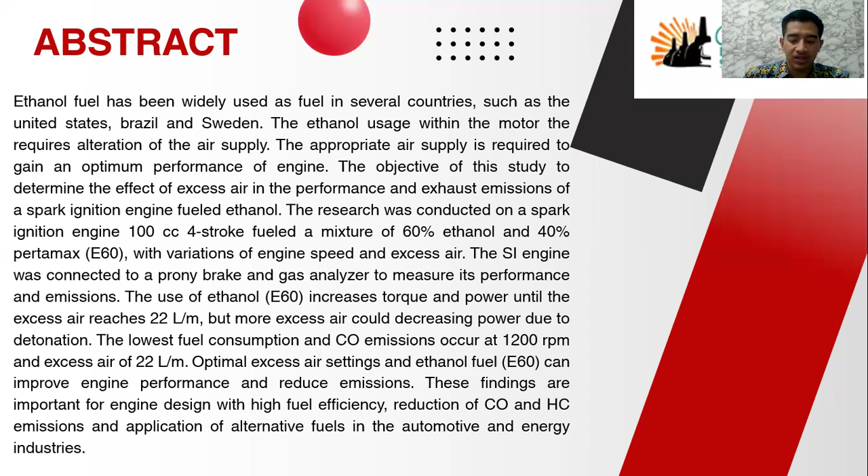The use of ethanol E60 increased torque and power until the excess air reaches 22 liters per minute, but more excess air could decrease power due to detonation. The lowest fuel consumption and carbon monoxide emission occur at 1,200 rpm and excess air of 22 liters per minute. Optimal excess air setting with ethanol fuel E60 can improve engine performance and reduce emission. These findings are important for engine design with high fuel efficiency, reduction of carbon monoxide and hydrocarbon emission, and application of alternative fuel in the automotive and energy industries.

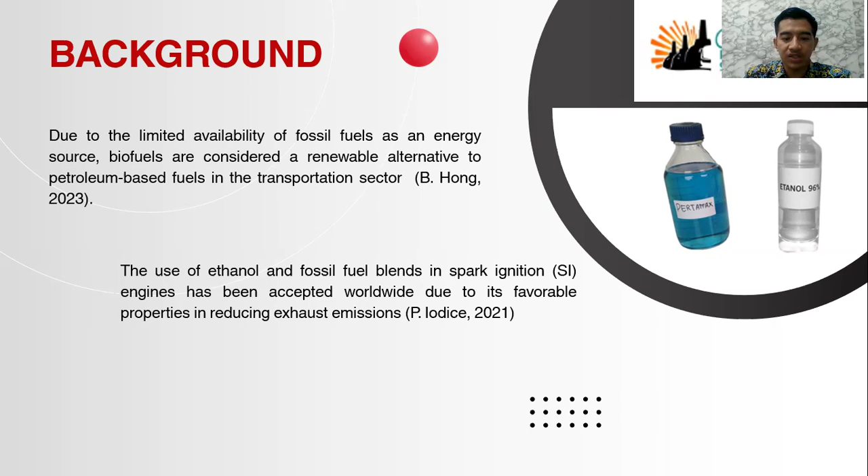Background: due to the limited availability of fossil fuel as an energy source, biofuels are considered a renewable alternative to petroleum-based fuel in the transportation sector. The use of ethanol and fossil fuel blends in spark ignition (SI) engines has been accepted worldwide due to its favorable properties in reducing exhaust emission.

2023: Experimental study on SI engine with ethanol and gasoline blend fuel shows higher volumetric efficiency resulting in greater power. 2022: the increasing demand for high power has prompted the development of combustion air intake systems, which will support the achievement of air and fuel mixing with the right air ratio.

2024: a study using an alternative method to create excess intake air flow. The method achieves a high air ratio without significantly compromising the flow coefficient, by modifying the intake port feature.

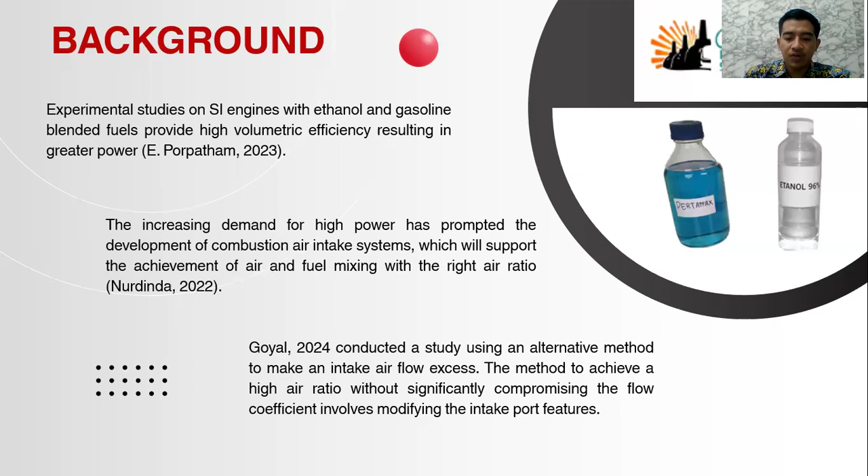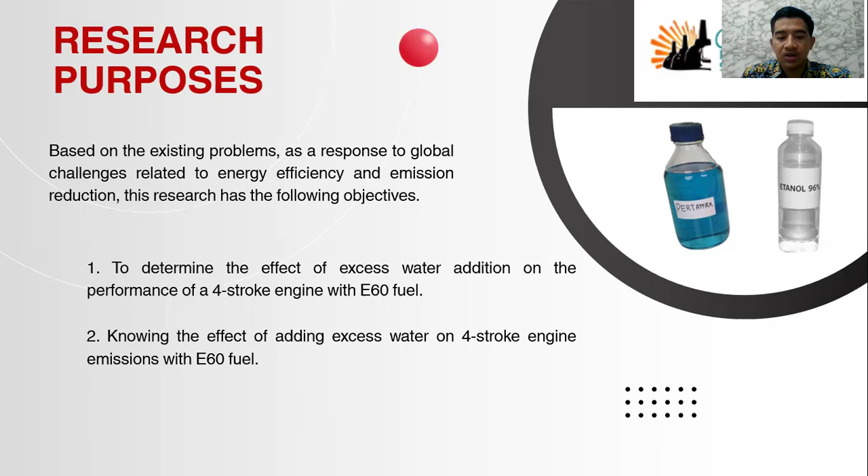Research purpose, based on the existing problem, as a response to the global challenge relating to energy efficiency and emission reduction, this research has the following objectives: one, to determine the effect of excess air addition on the performance of a four-stroke engine with E60 fuel; two, to know the effect of adding excess air on four-stroke engine emission with E60 fuel.

Method and vehicle specification: one, the research was conducted using the experimental method; two, the research was conducted on a four-stroke combustion engine; three, the fuel used was E60; four, the independent variables consisted of RPM and excess air; five, the SI engine was connected to a Prony brake and gas analyzer to measure its performance and emission; six, the specification of the test engine can be seen in Table 1.

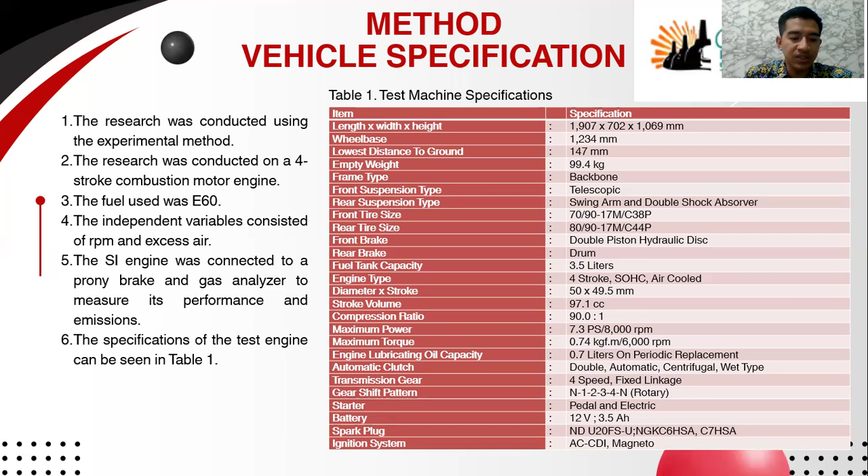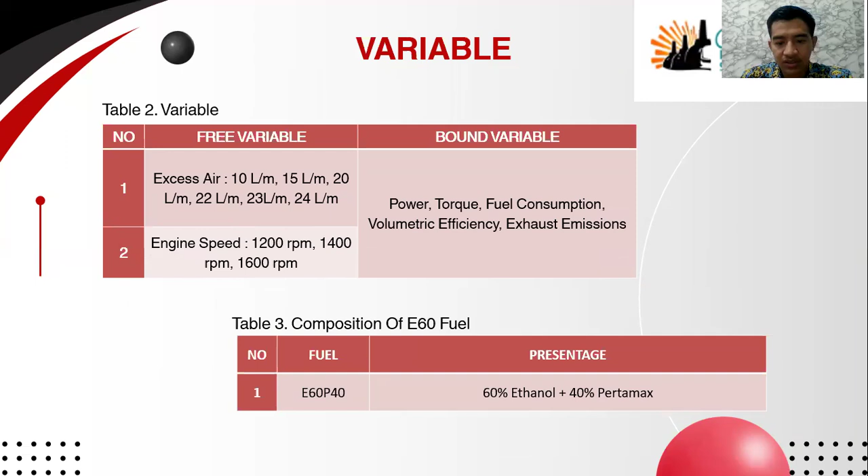Table 1, test machine specification. Table 2, free variable and bound variable. Table 3, composition of E60 fuel.

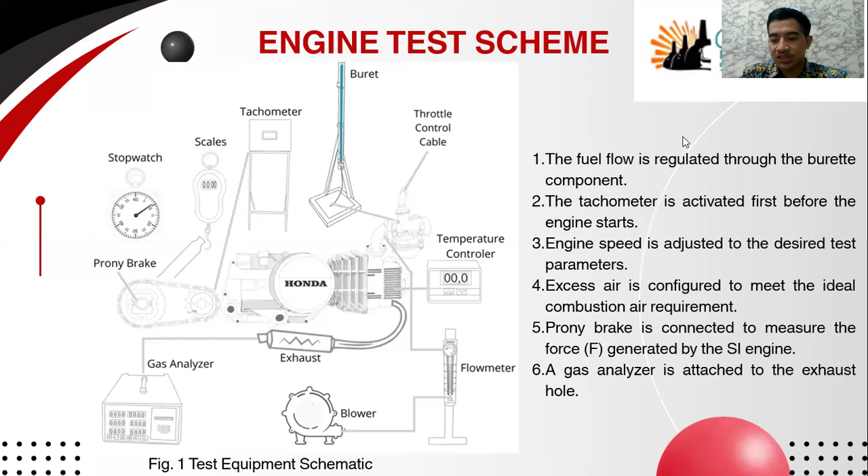Engine scheme: 1, the fuel is regulated through the burette component; 2, the tachometer is activated before the engine starts; 3, engine speed is adjusted to the desired test parameter; 4, excess air is configured to meet the ideal combustion air requirement; 5, the Prony brake is connected to measure the force generated by the SI engine; 6, a gas analyzer is attached to the exhaust hole.

Result and discussion. The results of the power test in this study are in accordance with research by Sugiarto 2019, which showed that higher engine speed can increase power due to a faster, more efficient combustion process and higher calorific value of gasoline.

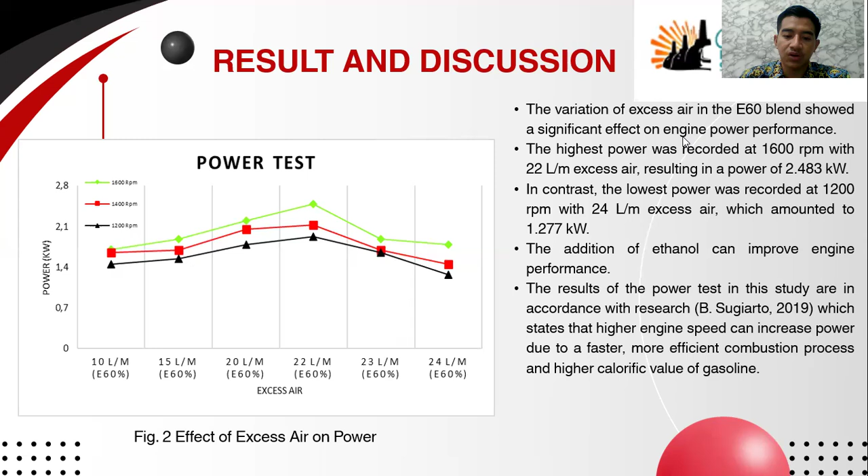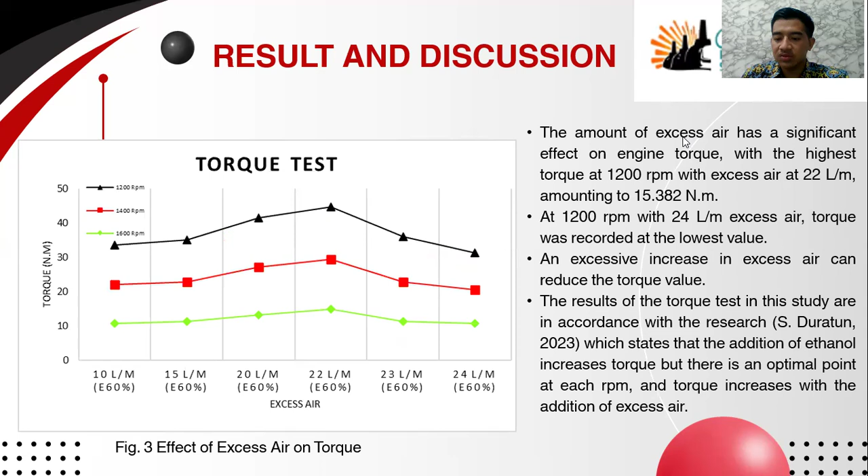Torque test: the results of the torque test in this study are in accordance with research (2023), which stated that the addition of ethanol increases torque, but there is an optimal point at a certain RPM, and torque increases with the addition of excess air.

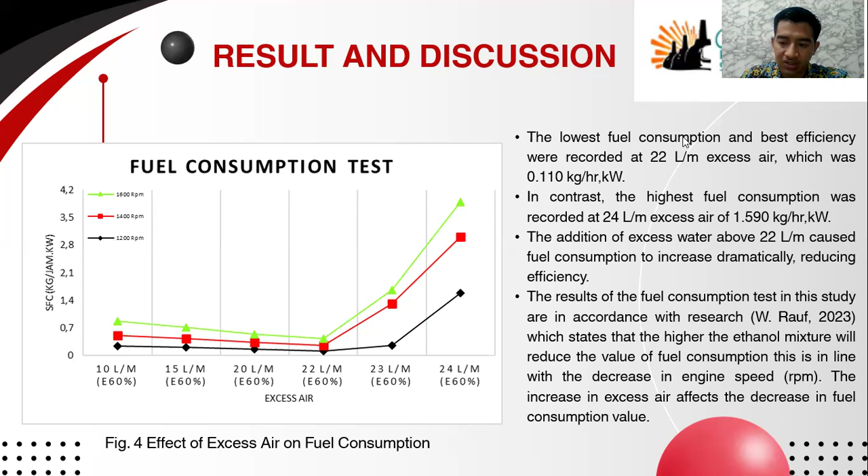Fuel consumption test: the results of the fuel consumption test in this study are in accordance with research (2023), which states that a higher ethanol mixture will reduce the value of fuel consumption. This is in line with the decrease in engine speed (RPM). The increase in excess air affects the decrease in fuel consumption value.

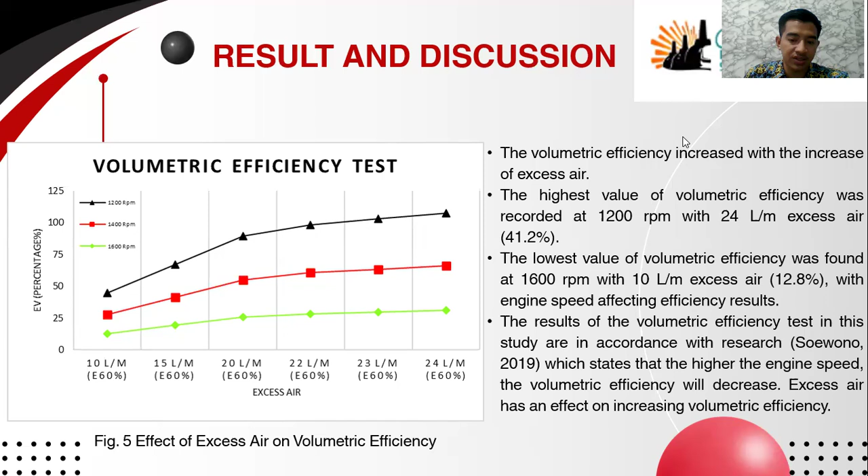The following is a graph of the emission test results.

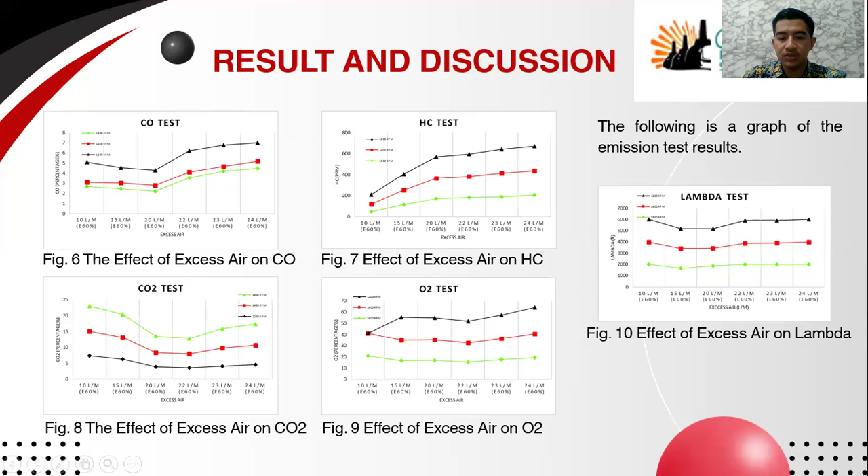The results of the emission tests show that ethanol addition can reduce carbon monoxide emission (Susanto 2021) and hydrocarbon emission, increasing combustion efficiency (2024). In addition, increase in octane and RPM affect the increase in carbon dioxide, but excessive excess air actually reduces the level.

Prasetyo 2022: ethanol addition also increases oxygen level as RPM increases, while excess air affects combustion efficiency. Muhaji 2023: lambda value tends to increase with increasing excess air and change in RPM.

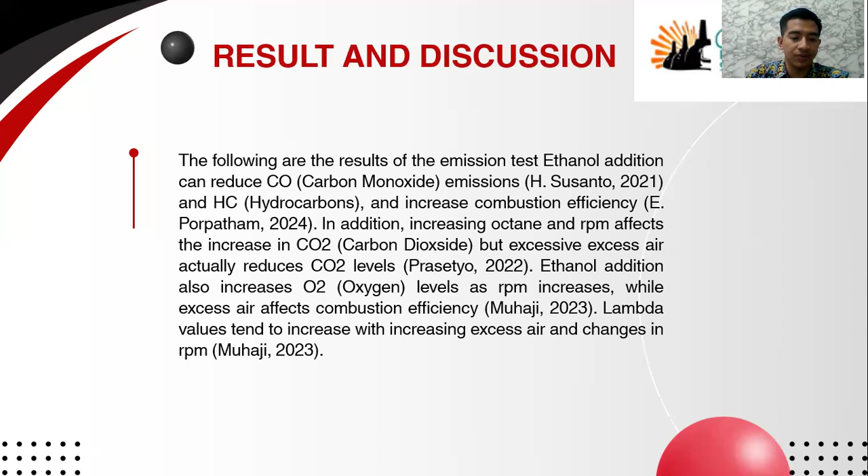Conclusion: 1. The excess air, engine speed, and E60 fuel mixture setting affected the performance, fuel efficiency, and emission of the internal combustion engine, with the highest power recorded at 1,600 RPM with excess air of 22 liters per minute.

2. The highest engine torque was recorded at 1,200 rpm with 22 liters per minute excess air, but it decreased at 24 liters per minute excess air, and optimal fuel efficiency was achieved at 1,200 rpm with 22 liters per minute excess air.

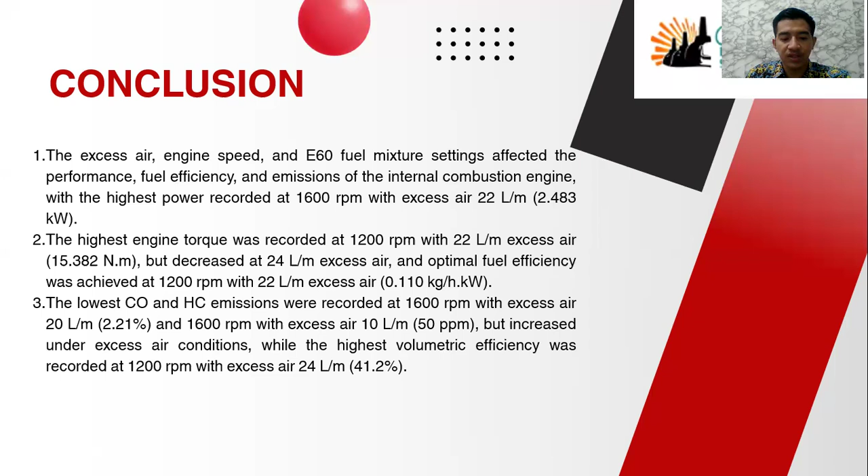3. The lowest carbon monoxide and hydrocarbon emissions were recorded at 1,600 rpm with excess air of 20 liters per minute, and at 1,600 rpm with excess air of 10 liters per minute, but increased under excess air conditions. The highest volumetric efficiency was recorded at 1,200 rpm with excess air of 24 liters per minute.